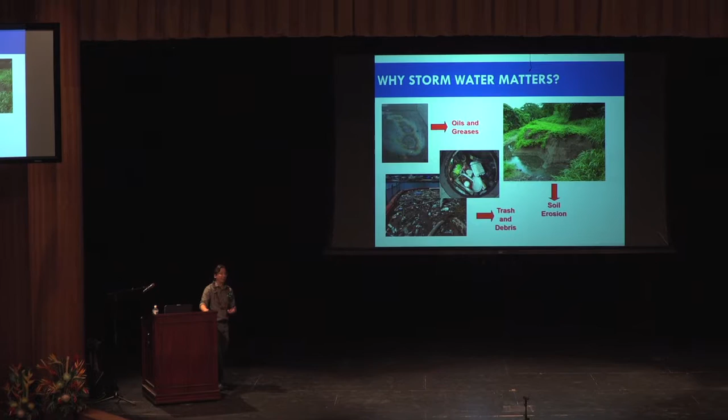As I was putting this presentation together, I started realizing the substantial changes we've undergone as a city agency. This goes back to when I first started with the city, back in 1996, around that time. From what it was then to what it is now, there has been quite a bit of change.

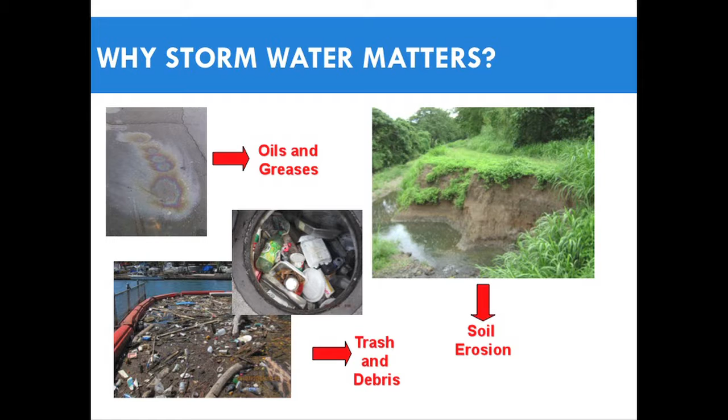So just to give you a little background, why do we do all of this? There are all kinds of sources where pollution comes from: oil and greases from cars and vehicles, trash and debris whether organic or man-made, and soil erosion, whether in the stream itself or caused by human activities such as construction.

Our program is in place under the large Clean Water Act, a federal program that gets handed down to all the states. The city and county is basically a regulated entity, so the city has to apply to the state for a permit. That permit allows us to discharge water from the city's drain system into receiving waters like streams, canals, and waterways.

You can see some of the effects of this water pollution on the receiving waters, such as sediment runoff. You can see a lot of the debris, the floatables, and of course a lot of that discoloration.

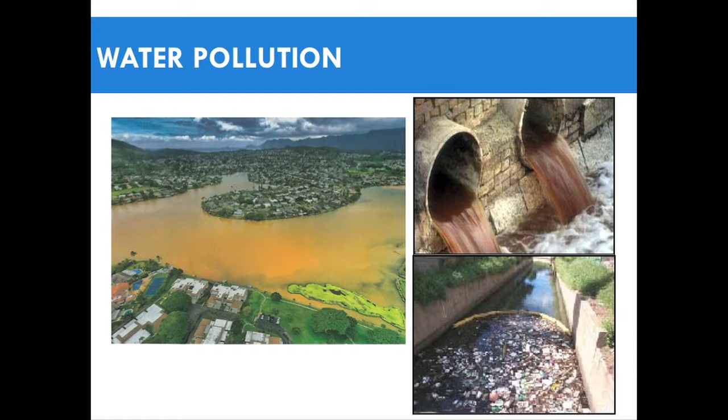So what are some of the immediate goals the city is trying to accomplish through its permit program? One is we're trying to comply with our MS4 requirements. The second is we're always trying to streamline our processes, since we have quite a large impact as a city, affecting pretty much all the residential urban areas throughout the island of Oahu. We're also trying to come up with a consistent approach.

Since there are regulations at the federal level as well as the state level, we're trying to come up with something consistent with existing programs so we're not overlapping or duplicating, but also not going against the current regulations. We also try to streamline and standardize the process, which is one of our goals within the city itself.

As Marlena mentioned, one of the things we're tasked with as a city agency, part of our Department of Facility Maintenance, is that we need to coordinate with all the city departments.

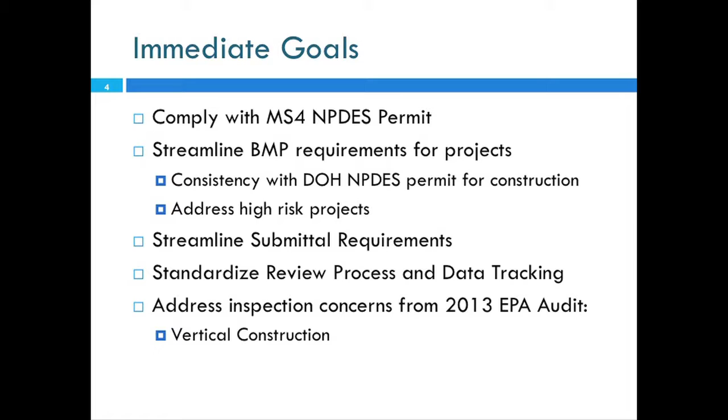The stormwater program, the way we approach it, is basically one water. It's not just one department or section's responsibility, but the whole entire city that's responsible. So we coordinate with the fire department, police department, parks and recreation, and enterprise services.

We also work with agencies that implement programs pertaining to construction, like our Department of Planning and Permitting and our Department of Design and Construction. More recently, with the rail project for HART, we've had to do a lot of this coordination, making sure everybody is following the guidelines.

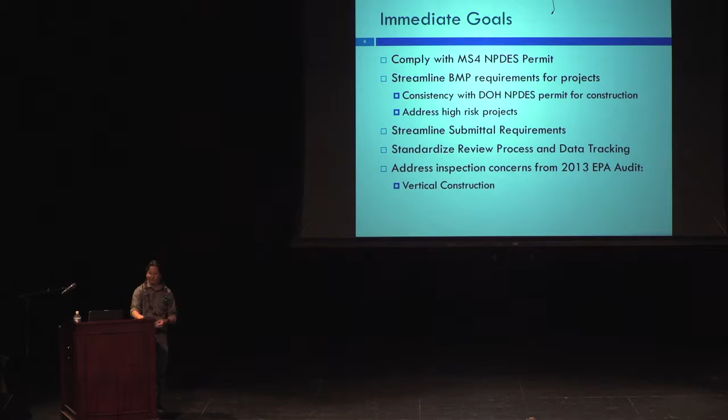Lastly, for the long term, this is ultimately, I think, what everybody here is working toward. Taking the first step to attend this workshop is a good step on your part. What we're trying to do is promote a sustainable future, protecting our nearshore waters like our beaches, streams, and ocean. Here in Hawaii, we're basically on an island surrounded by water, so whatever impacts we create will impact future generations. That's probably one of the long-term goals we're always trying to establish.

Now, how does this affect construction? Primarily, it's handled in the city by the Department of Planning and Permitting. Within their department, they have rules referred to as the rules relating to soil erosion standards, adopted in 1999, and the rules relating to storm drainage standards, adopted in June 2012.

Erosion standards are more for temporary things, things that occur during construction where you have to follow certain practices and implement best management practices, or BMPs. The drainage standards look more at long-term permanent things that, once built, will be there for the next 10, 20, 50 years. That's how the city implements its programs.

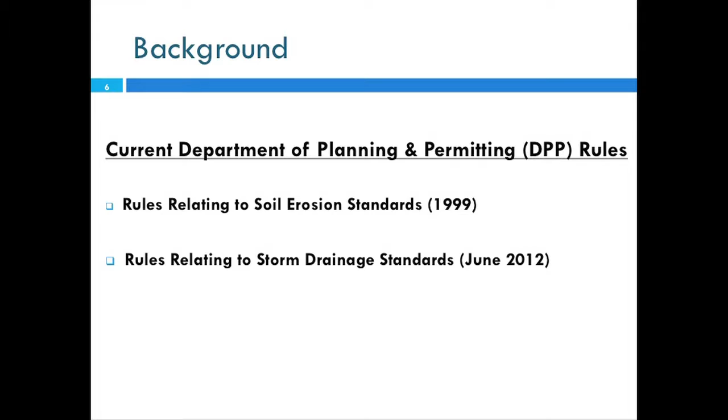When we talk about the overview and changes I'm going to be sharing, some of what started this whole movement goes back to 2013, when the EPA, under their Region 9 office, performed an audit of the city's program.

Their inspectors or auditors came down to look at the city's overall program. It's a pretty big deal where all city departments are asked to come in, and they evaluate how the city is following its permit and implementing its program. From that evaluation, they found several permit violations as well as program deficiencies. As it relates to construction, they saw that the city's construction plan review and BMP requirements were inadequate.

When they looked at all our documentation, the rules I mentioned earlier, they felt it was inadequate. The other issue was inspection oversight—for both public and private projects, the city wasn't performing its necessary inspections in accordance with its program plans.

They also recommended the city implement dedicated stormwater inspections, looking at BMPs to make sure contractors were following the plans they had put in place, and then developing a risk ranking process to evaluate its effectiveness. Based on that audit, a notice of apparent violation was issued to the city in October 2013.

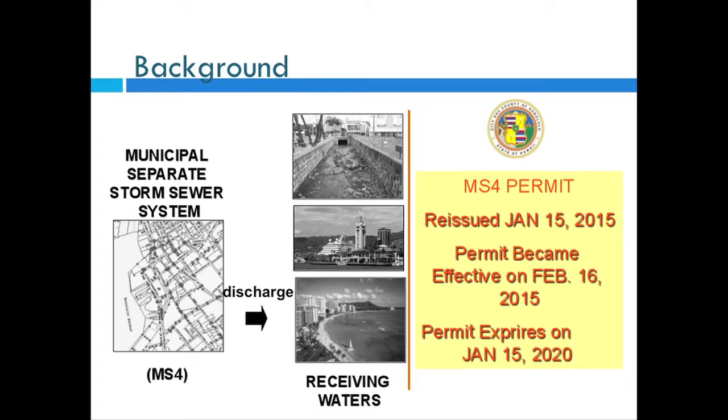The city manages this through its stormwater management program plan, which has 6 elements: public outreach, pollution prevention—including housekeeping practices like street sweeping and drain cleaning—post-construction measures, industrial and commercial programs, illicit discharge monitoring, and the one I'll focus on for this presentation, the construction site runoff program.

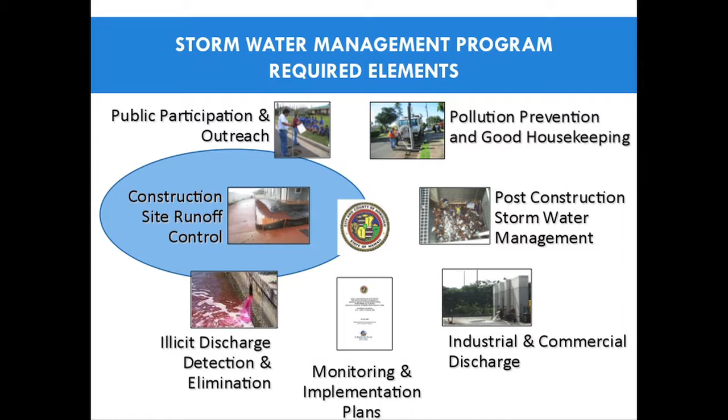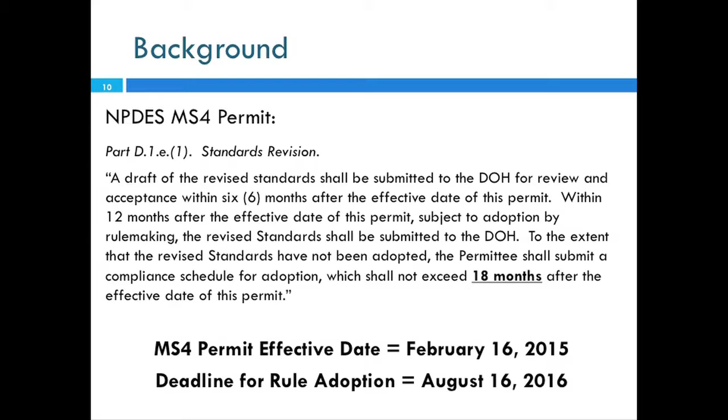So as I mentioned, the city's permit was reissued in 2015, and in that permit it basically said that within 18 months, the city shall update its rules as it relates to both construction and post-construction. That essentially put a deadline of August 16, 2016, by which the city needed to go back, look at its existing rules, and update them to be in compliance with those requirements.

As I mentioned earlier, we had two separate rules, one pertaining to drainage, the other pertaining to construction erosion. What we essentially did was combine them into one. This made it a lot easier from a clean water environmental standpoint, since it was all under one rule rather than having to refer to one versus the other. It also put everything in one place so we could always compare to see if there were any discrepancies.

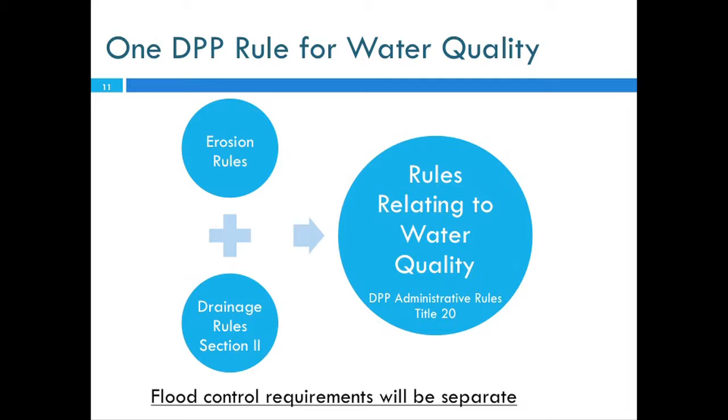So that's where it led to what we're now referring to as the rules relating to water quality. Some of the timeline: back in 2015, that's when the city's permit became effective. On March 6th, 2015, the Senate introduced a resolution that went through, asking all the county agencies to go back and look at their rules and see if they needed to be increased or made more stringent. That was already on our mind because of the permit, but this was another thing that came across our desk.

One thing we did prescribe in those rules, though, was that we didn't want to make them effective until one year later, which is why on August 16, 2017 the rules actually become effective. The reason is we made such substantial changes to those rules that we felt we needed to go back, talk to all the city agencies, get the contractors involved to do a lot of outreach, and start implementing these changes within our programs, because it's going to change how they do their reviews, how they track information, and how they process all these new plans and submittals pertaining to the city.

Within those rules, there are certain key definitions I wanted to point out. Some things we want to emphasize: what is considered a regulated project versus a non-regulated project. A regulated project is one that has to come into the city for a grading, building, stockpiling, grubbing, or trenching permit. Any of those permits would automatically trigger falling under these rules. If it didn't trigger any of those, then the city wouldn't have jurisdiction over that.

There are also some specific exemptions built into the rules, like emergency work and putting out traffic control devices, signs, striping, and things like that, which isn't necessarily where there's land disturbing activity. Whenever you penetrate the ground, actually disturbing it and moving the soil around, that's where we want to target. This is where the rules become effective.

The other key definition I wanted to point out is the erosion and sediment control plans. This is something the city implements as part of how it complies with its requirements, and it's a key part of how the inspectors follow what the contractor is doing. Basically we're talking about the actual drawing that shows the limits of your project, where all your critical points are, your discharge points, catch basins, inlets, where you're going to be disturbing the site, and how you're going to be phasing your work. As a contractor, you use it while doing your work, but the city also uses it as part of their inspection process.

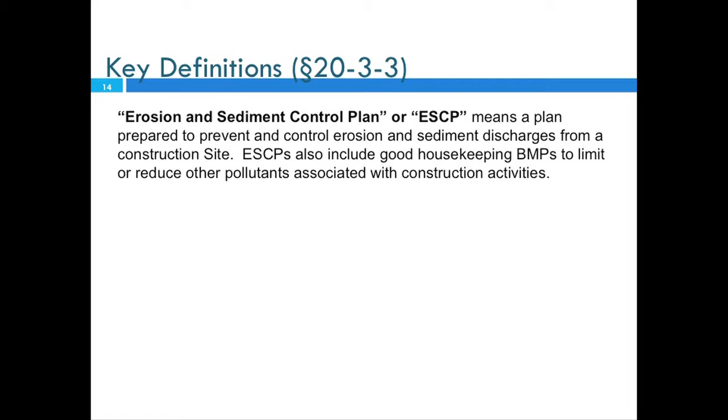That's something we're making changes to in terms of what needs to go into these sediment control plans. This is somewhat separate from what the state requires, because under their NPDES program, the State Department of Health requires that you develop what's called a stormwater pollution prevention plan, or SWPPP.

It's a similar process, but it streamlines things for a city inspector in terms of what they're looking for on an actual drawing. They can pinpoint the location of where these BMPs are going to be installed and how you're going to go about doing it.

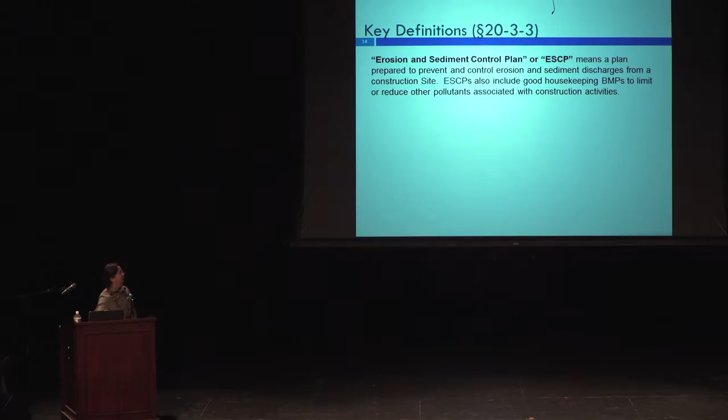Other key definitions I wanted to point out: something we've added into the rules is a certified water pollution plan preparer. It's still in development, not something the city has really put in place, but it gives us an opportunity to come up with a more standardized process to get someone preparing the plans to be more trained and qualified in putting together erosion and sediment control plans.

We don't have it in place right now, but it's described in the rules. The other thing the city has always had in place is a design engineer—a licensed civil engineer in the state of Hawaii who can stamp the drawings. This pertains to larger projects where, under the city's ordinances, somebody with those qualifications needs to submit the plans to get approval from the city.

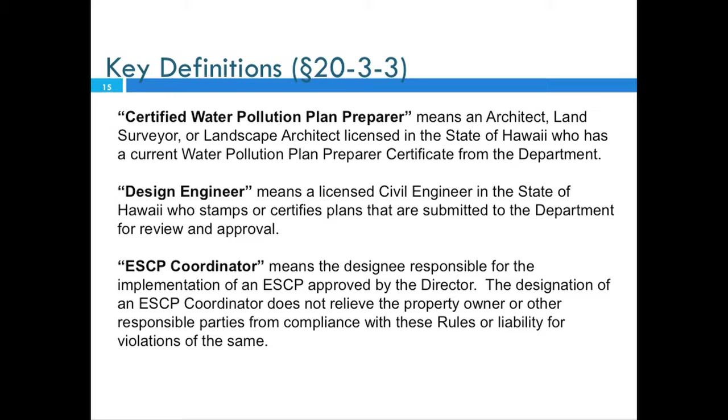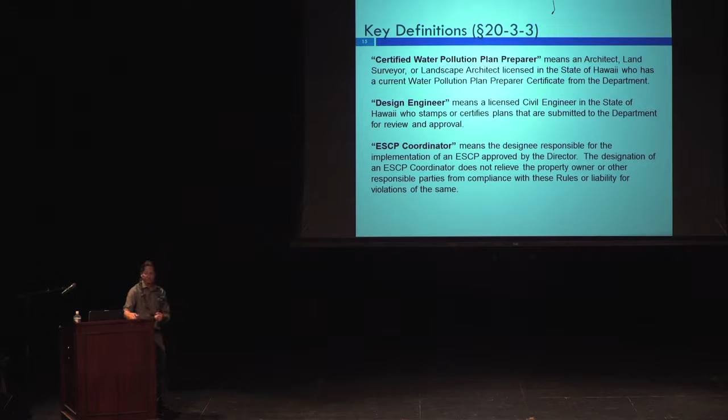The last one is the erosion sediment control, or ESCP, coordinator. This is somebody who doesn't necessarily have specific training, but is the designated person providing inspections of your construction site—making minor changes to the plans or doing the inspections themselves, as the representative of the owner. This can also be the owner himself, for smaller projects, but it's basically a designated person who's responsible.

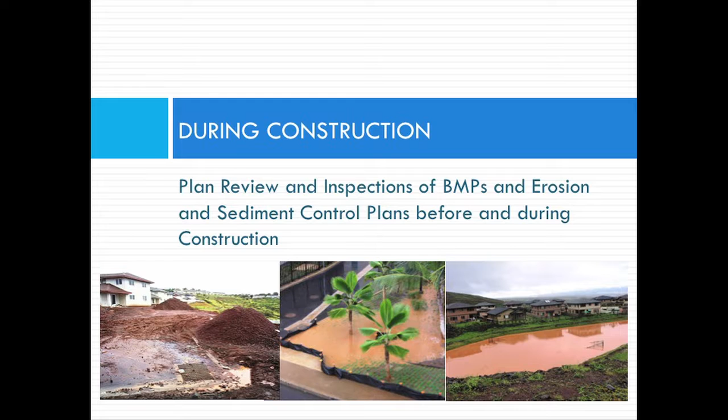So when we talk about construction, we're talking about how we go about plan review and inspections. Some key points from a city standpoint of how we encourage contractors and developers to comply with requirements: one is putting together an adequate and effective erosion and sediment control plan, or in the State Department of Health's case, a stormwater pollution prevention plan, SWPPP.

The other thing is emphasizing the training you provide to your contractors and subcontractors, and the communication process. We see a lot of times when meeting with contractors that they're assuming somebody's going to take care of it, but because of that communication gap, there's no one person responsible, or everybody's pointing the finger at somebody else. So it's key to continuously communicate and provide training for your subcontractors and contractors on site.

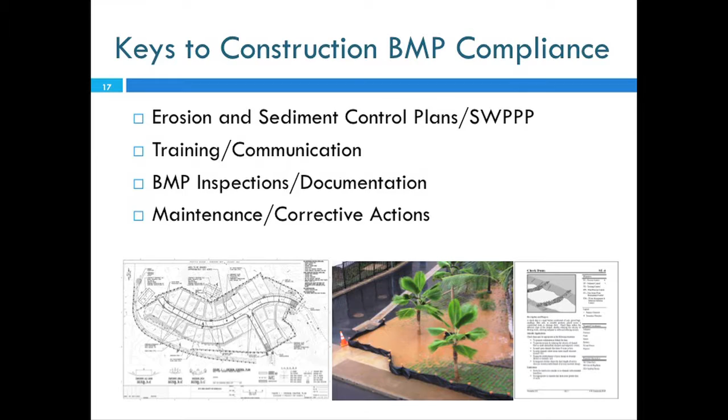And of course you have the inspections we ask the contractor to perform, as well as documentation. Those are important to have on site, because that's what lets the inspector who visits see how you're staying on top of BMP implementation and maintenance.

That leads into the last one: how you perform maintenance and corrective actions. We always emphasize to contractors that this is a dynamic process. Projects are always ongoing, so things need to change as site conditions change—something may not work in a given situation, so there needs to be a change at that time. That's where documentation and communication become an important part of the process.

So now when we talk about the current rules that I mentioned that we adopted, some of those major changes we talked about was updating it to be consistent with the state and federal laws. That was one of the key goals that we needed to do.

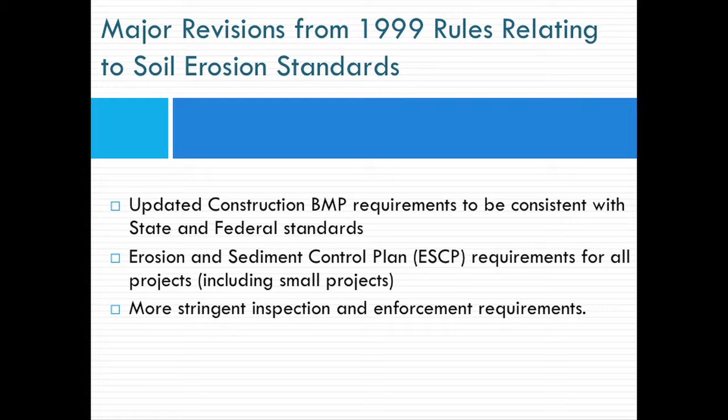And then the other part of it, like I mentioned earlier, was that we had that audit performed, in which case what was pointed out to the city was that we needed to emphasize more of the smaller projects, as well as those projects that are in the vertical stage. So we're talking about high-rise projects, condominiums, things that are in the more vertical stage, like your house building, things like that. And then, of course, putting in more stringent inspection and enforcement requirements.

What we did implement as part of this rulemaking process was we also created subcategories within that smaller category 1 projects, so what we're calling category 1A, 1B, and 1C. The easiest way to look at it is 1A would be your small, 1B would be your medium, and 1C would be your large. So 1C is like your 1 acre and larger.

1B would be anything over 1,000 square feet or larger, as well as commercial development. And then 1A is all your small residential type, where people are putting in a retaining wall, or putting in fencing, or an addition to their existing home or something. So it's something that's less than 1,000 square feet.

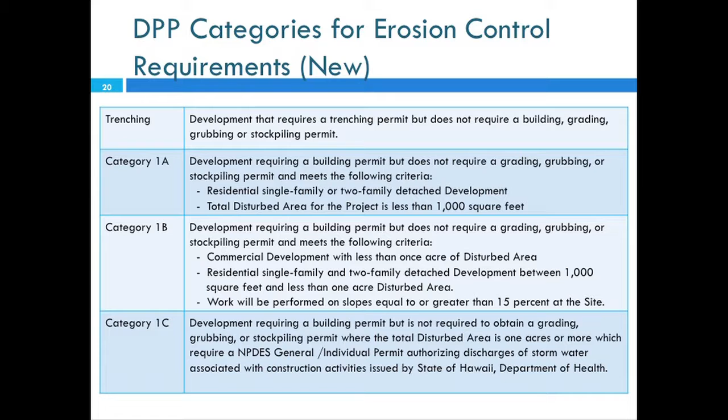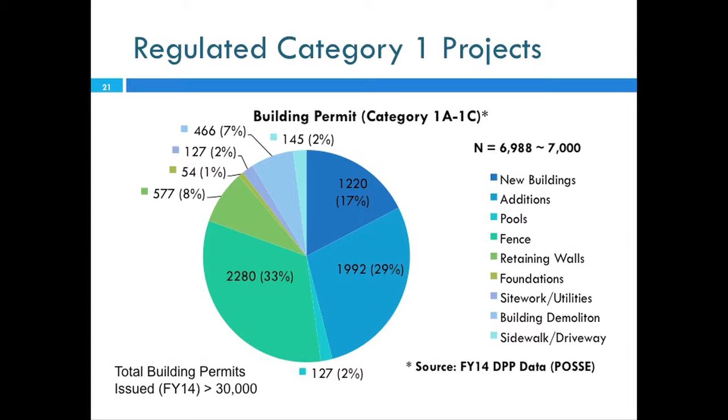But you can also see that the majority of the projects, maybe about 80% of them, are in that new building, additions, fencing categories. The rest are real small, less than 10%, which is like your retaining walls, your foundation, demolition type of projects.

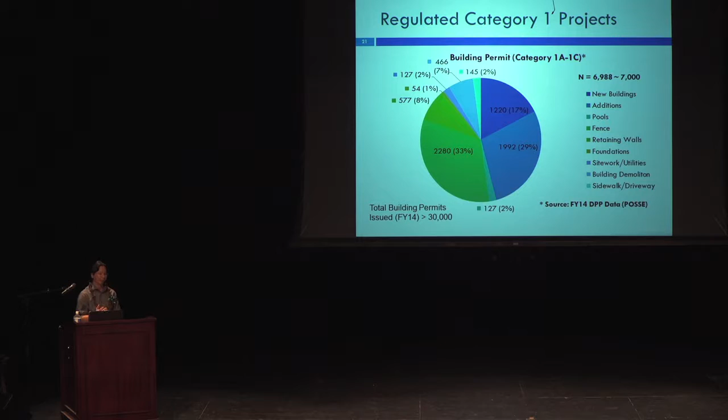Okay, so with the water quality rules I mentioned, there are 3 requirements, and this is for any project that you talk about, both at the federal and state level. We're talking about erosion prevention, sediment control, and good housekeeping.

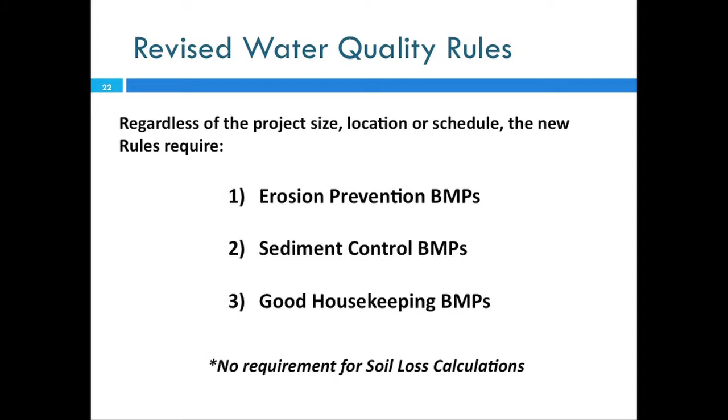Erosion prevention is basically where you're talking about preventing the water from displacing that soil. Once the water hits it, then it's going to start to travel and actually move that particle of soil. So what we're trying to do is prevent that from happening in the first place. Things you could do are, of course, vegetation, riprap, mulch, erosion control blankets are some of the other options. But also you can do things like diversions, where you're actually trying to get the water away from your project site, so that it's not actually flowing through the sloped areas, things like that.

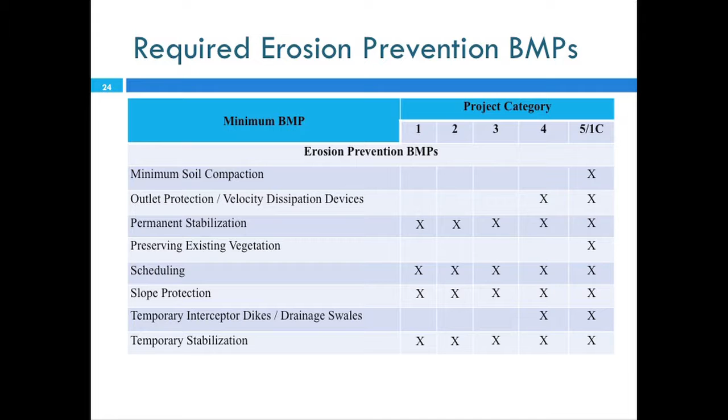So for all projects, whether small or large, the minimum requirements include putting together a schedule, providing some kind of permanent stabilization once the project is done, providing slope protection, and temporary stabilization. But for larger projects, that's when we start talking about diversion structures and preserving some of the existing vegetation.

Sediment control BMPs are for things where water has already traveled over the site and is actually carrying sediment with it. This is not the most preferred method, but it's also the most costly and time-consuming, because now you're actually trying to remove the sediment from the water itself - things like check dams, silt fences, detention basins, and sediment basins.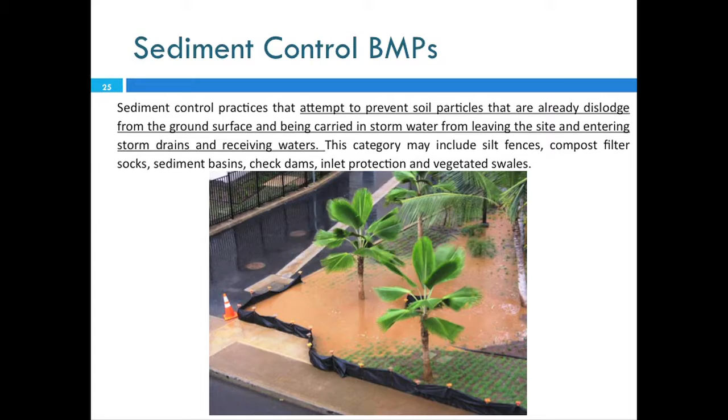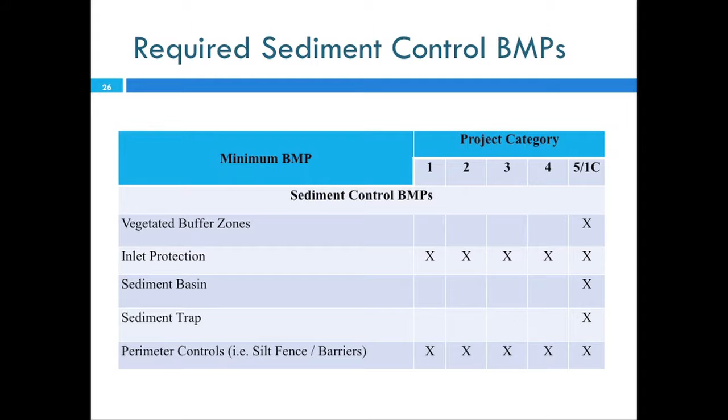Looking at the rules from a category 1 to 5 standpoint, all projects would require some type of inlet protection, whether small or large, and perimeter controls like silt fences or biosocks. But for larger projects, we're talking about sediment basins and sediment traps - things where you need the space to treat that amount of water.

Lastly, we have your good housekeeping BMPs, and this is, I think, the most important one to emphasize because it's the most cost-effective. This is the best way to actually prevent any discharge of pollution from your site. So we talk about day-to-day activities like fueling, chemical storage, where you're storing equipment, and stockpiles.

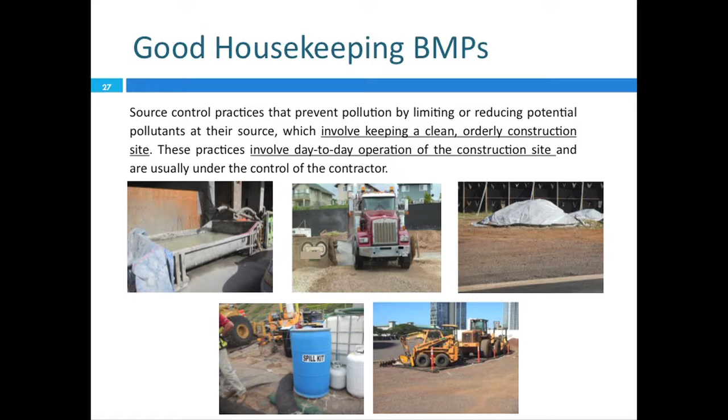So these are all the recommendations of what you would need to do. The reason we emphasize good housekeeping is, one, it's cost-effective, but also because it addresses a lot more of the pollutants besides just sediment - things like nutrients, metals, oil and greases, and pesticides. This is where good housekeeping becomes much more effective.

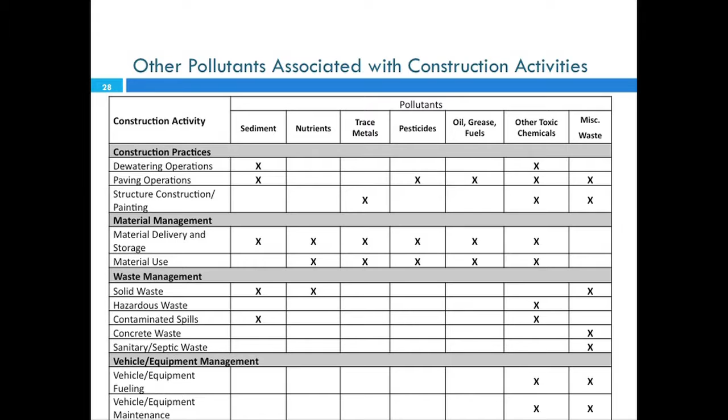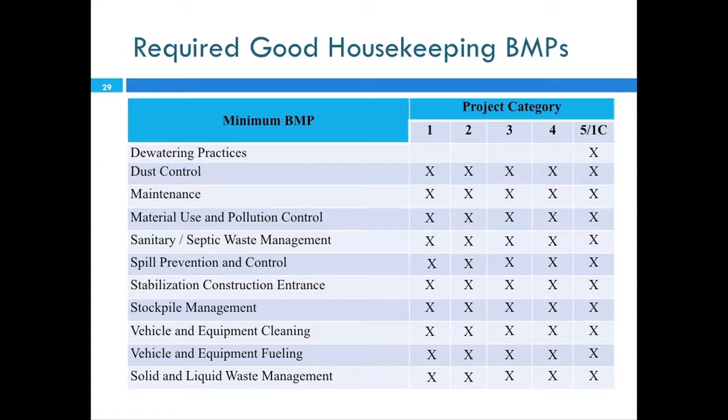And you can see when we look at all the categories from 1 to 5, good housekeeping pretty much applies to all projects. So whether it's a small project or a large project, you would need to take that into consideration.

Some ways the city provides guidance is similar to the Department of Transportation highway system - we have what is referred to as our construction BMP manual. It provides guidance and recommendations, and gives you fact sheets you can use as part of your SWPPP plan, saying these are the practices you'll be following, whether it's a silt fence, with diagrams and things. It's a useful document.

When we talk about erosion sediment control plans, as you're putting all this documentation together, we had to look at it from a standpoint of small projects versus large projects. Large projects, I think, we always had that in place, but for small projects, this is a totally different effort now - something we had to develop. We came up with what is essentially a checklist.

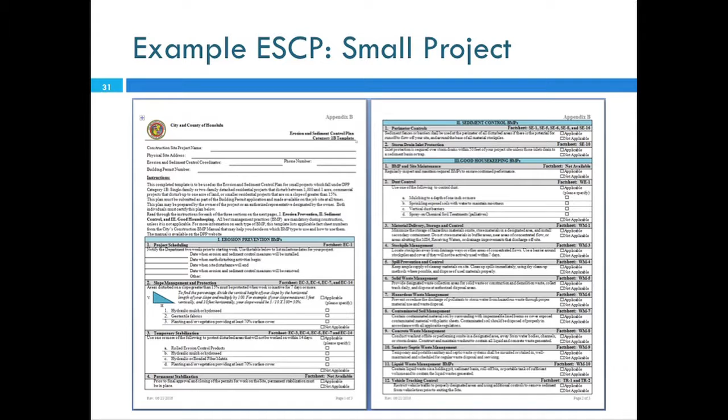This is to guide the homeowner or contractor working on a small project to go through these processes and identify which BMPs they think are most effective, which ones will be applied to their site, and then submit that to the city for approval.

For large projects, which most of you are probably aware of, this is where you actually have a site plan designed by an engineer, with a layout, diagrams, and details.

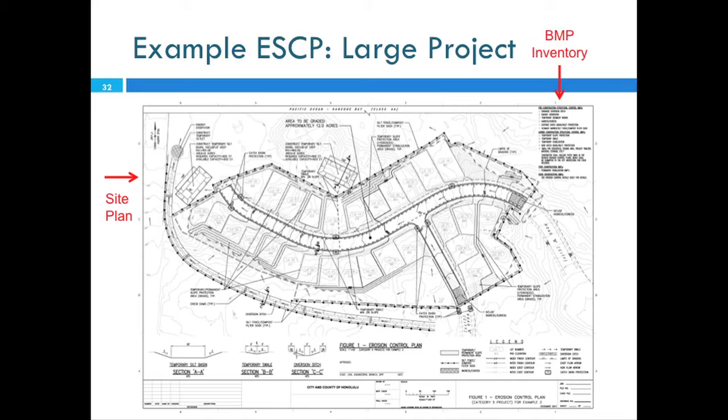Some key things the city expects from a Department of Planning and Permitting standpoint are identifying the BMPs being applied on the site, showing the actual layout of where things are located, and providing details of how it's going to be installed, which helps the inspector verify that things are being followed according to the plans.

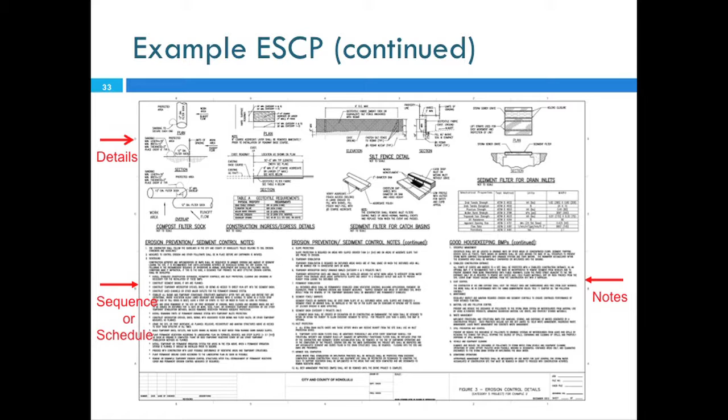You also need notes describing the sequence of events, how you're going to schedule things, and descriptions of requirements for the contractor to follow in terms of maintenance or inspections.

What I wanted to show here is that the site plan was prepared initially, but what we expect from a city inspector standpoint is that this is always a dynamic process going through revisions. You can see the red lines where they're moving a basin to another location, or implementing additional BMPs because the current ones haven't been effective, so they add more BMPs.

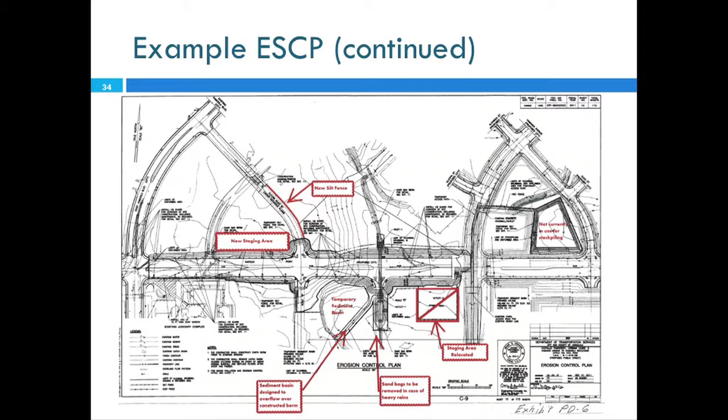So that's what this plan is expected to show - this process of redlining, moving, and adjusting according to your site conditions.

This is also something that, from an inspector standpoint, we need to differentiate between what is temporary versus what is permanent. This is what we call a post-construction BMP plan - what are some things that will be left on the project site after it's built? If you're putting in a sediment basin, is it only temporary, or will it be there at the end of the construction contract?

At that point, whatever is shown on this post-construction BMP plan, they're expecting at the final walkthrough and final inspection that all these things are still going to be in place after the project has been completed.

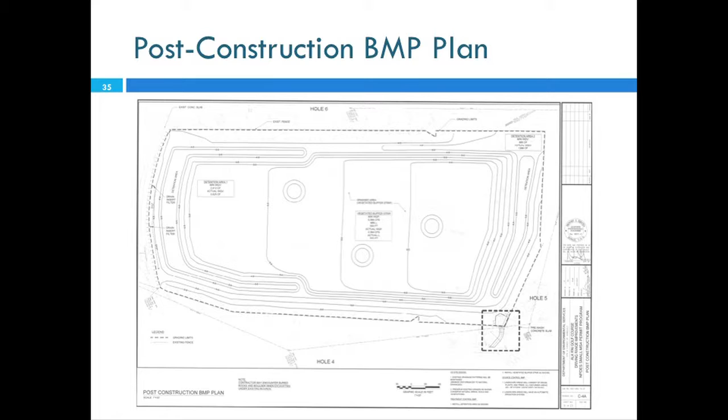I mentioned there are three things the city looks at. One is the sediment control plan. The other is your inspections. The way the city does it, there are three layers of inspections that are implemented.

One is the self-inspections, performed by the owner or contractor throughout the duration of their project. You also have the city inspectors - on a private project, the Department of Planning and Permitting will come out on a regular basis to inspect your project.

But if it's a city project, then the Department of Design and Construction, DFM, ENV, or whoever is responsible for that project will have an inspector come out to verify that the contractor is following their inspections, their documentation, and their BMPs.

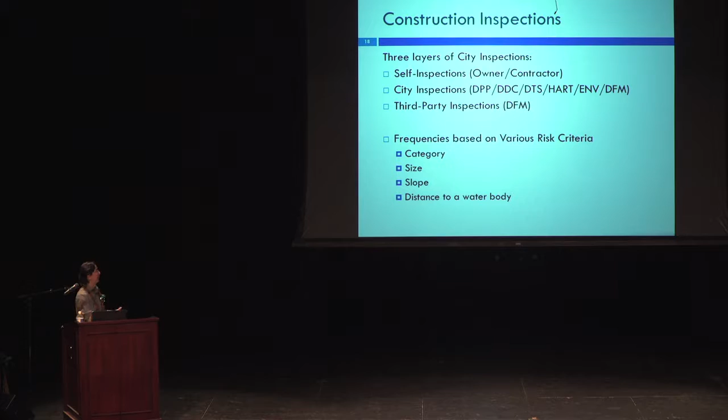And lastly, we have what's referred to as third-party inspections, which just started with this new permit. I mentioned back in that 2013 audit, the state as well as the EPA auditor wanted the city to implement this third-party inspection - somewhat like an independent party not associated with the project itself - to come in and look at how they're performing, how they're following their BMP plans, and how effective it was.

So that's something that we just started this year. If you're a contractor, you might have started to notice some of our third-party inspectors coming out to your sites, basically looking at some of your BMPs and seeing how they're following it.

From a self-inspection standpoint, our rules are basically saying that for pretty much all projects, they need to be inspected on a regular basis, but we came up with this risk ranking process so that larger projects would need it done more frequently.

To be consistent with the state's requirements, for any projects that are 1 acre or larger, you would need to do weekly inspections, same as the state level requirement. For somewhat smaller projects, we felt that Category 3, 4, and also trenching projects would also require weekly inspections because of the critical nature of the trenching work.

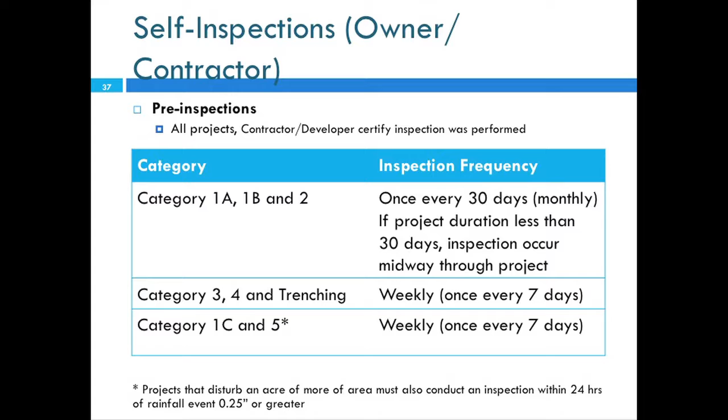Any type of trenching permit that you need to get from the city already tells us that you're doing work in the city right-of-way. So if you're digging up a trench in the roadway, there's a good chance that if there's any rainfall or runoff from your project site, it's likely going to go into our storm drain.

That's why we felt it needed to be done more frequently. But for smaller projects like your Category 1 projects, we're talking about doing inspections on a monthly basis. Not as frequently, but it still needs to be done.

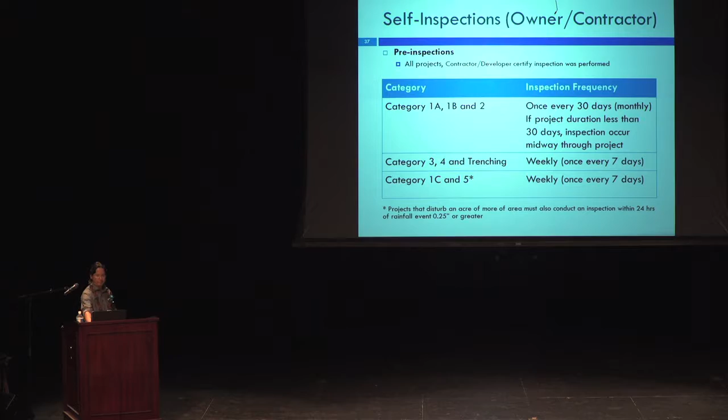In the rules themselves, we're actually prescribing recommendations on the type of inspection checklist that we've developed. We came up with something that's kind of similar to the Department of Transportation Highways inspection checklist.

What it basically has is your general project information, and then the type of inspection you're doing, whether it's a pre-construction inspection, a during-construction inspection, or an inspection during a rainfall event. So you would need to check off which one you're doing.

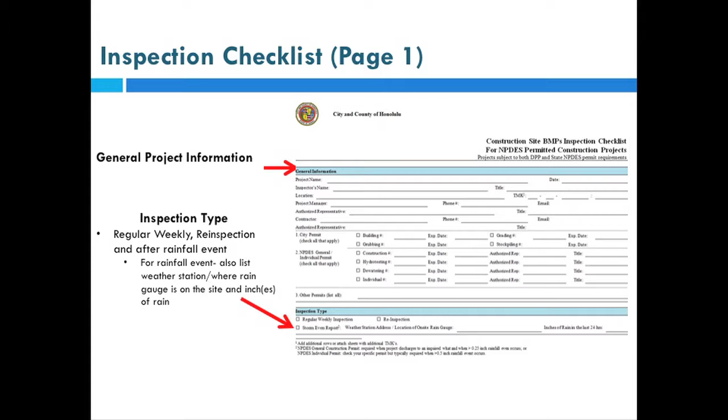As you go through the inspection checklist, you would need to describe the activities you're involved in, what your project is going to be doing, and what documentation you should be having on your site.

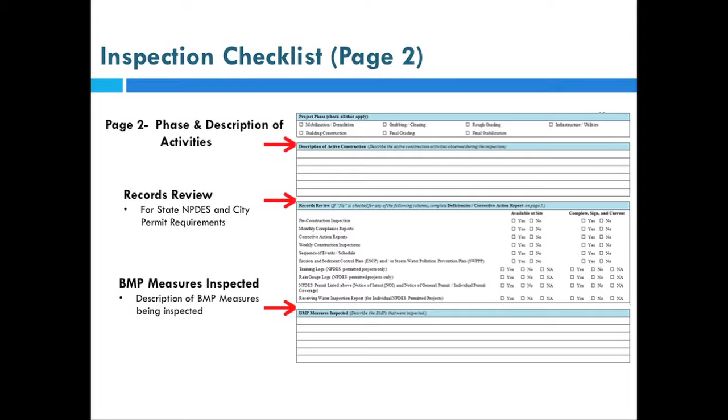This is in compliance with the state's requirements for their NPDES, so you would need to have your monthly compliance reports, documentation for your weekly inspections, things like that, and of course your BMPs that you're inspecting.

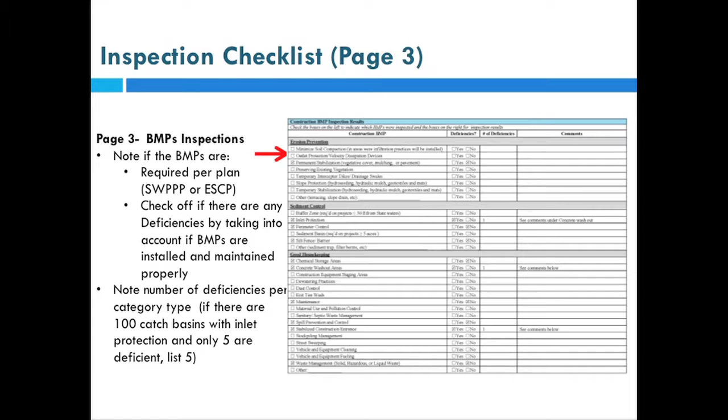The next page would be where you're actually looking at all the different types of BMPs. You would check which ones apply and how they're performing, note any deficiencies, and from there some kind of corrective actions would need to be taken.

Each inspection report would need to be signed by that designated representative. This is where we would attach a corrective action log, noting the photos, describing what the deficiency was, and what corrective actions were taken.

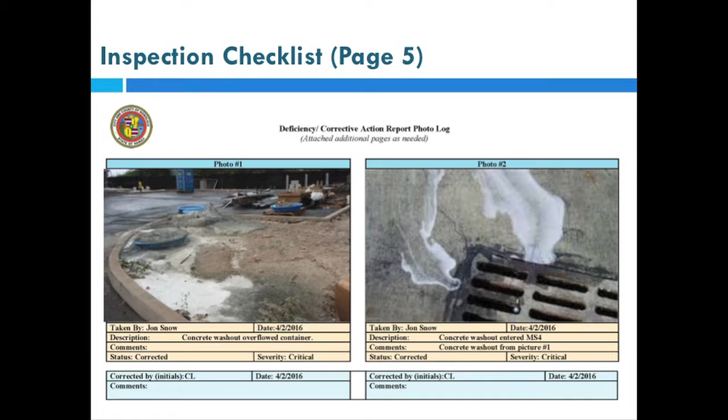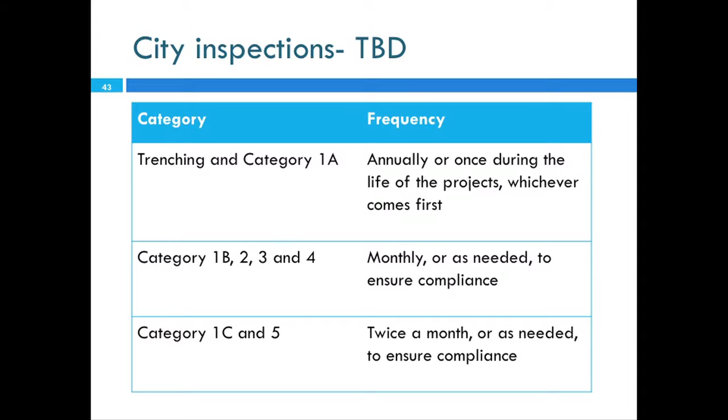Lastly, we have our third-party inspections, for which we're trying to come up with this risk ranking process, because the city has so many projects out there that we're likely going to have to target the most critical projects that we need to inspect. From there, we're going to be coming out on a monthly basis.

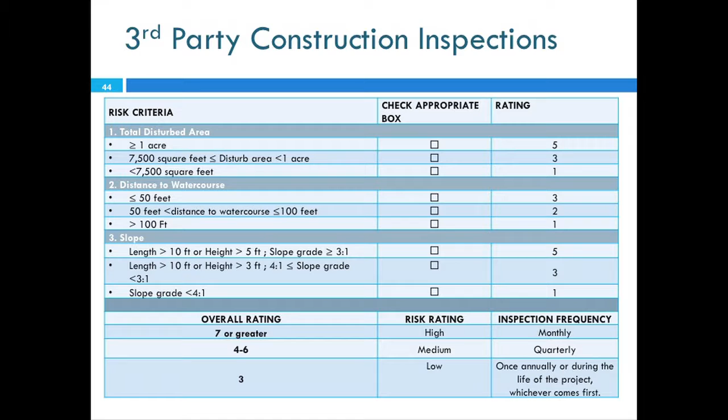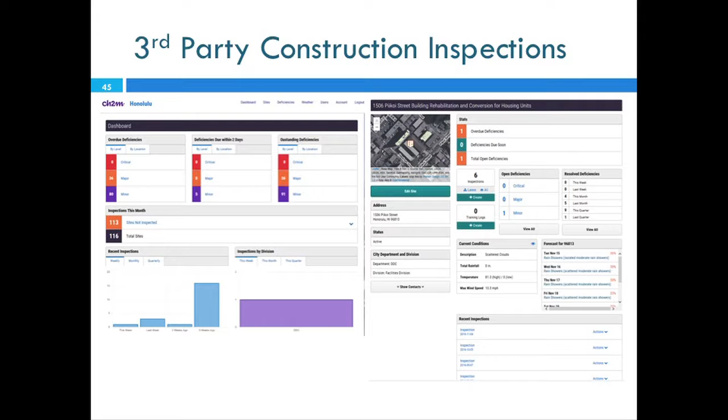This is where we can start seeing how often and how many deficiencies occur and where they're occurring, which helps with our program effectiveness. We can even see which contractors are performing well and how many deficiencies are being issued to each project.

We can actually look at a specific project as well as the type of contractors performing, and we can see if there might be some way that maybe we need to do some outreach, or maybe we need to do more training for a certain type of contractors because we're seeing a lot of deficiencies at those sites.

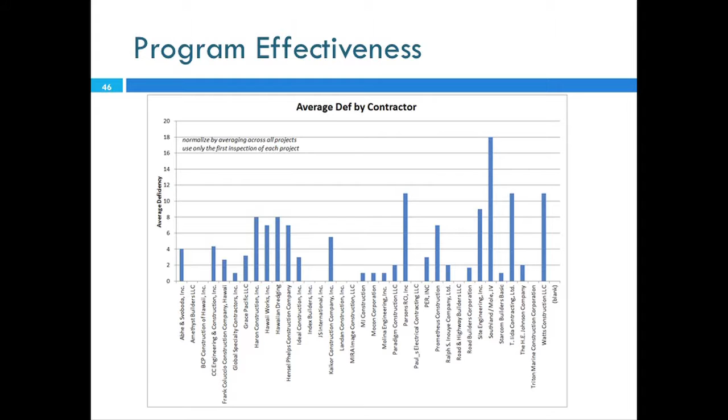The way that we categorize the inspections is we break it down into what is referred to as minor, major, and critical deficiencies. Minor deficiencies are your standard type, things that don't really pose a threat at this stage, but it's something that we think could lead to becoming a bigger problem.

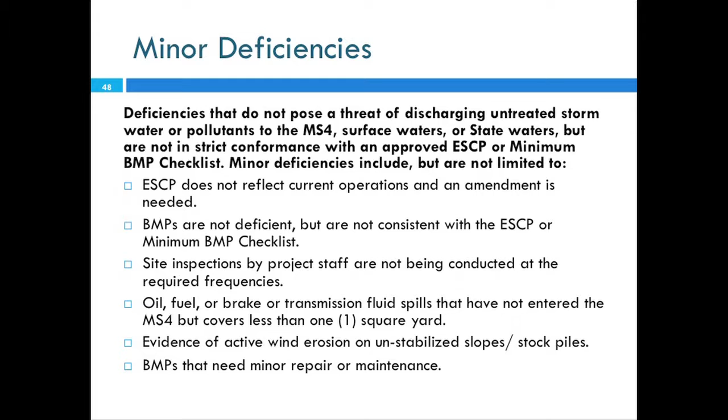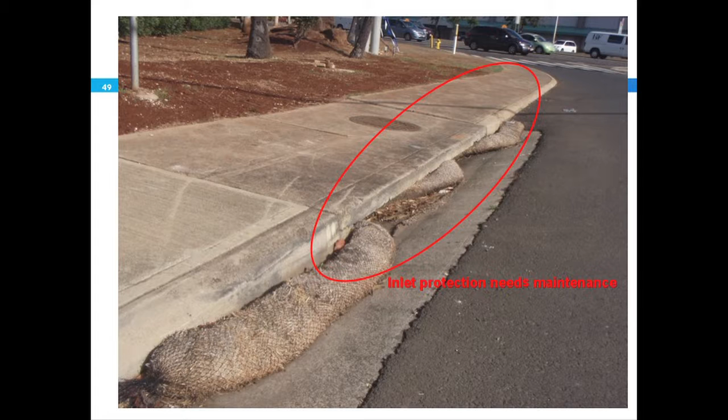So this might be even just documentation, not having your inspections on site or available. Or maybe there might be some BMPs installed, but they're not quite performing up to the standard they should be. Some examples are like the inlet protection device you can see, but it needs maintenance - it's also starting to fall into the catch basin. So that's what would be considered a minor deficiency.

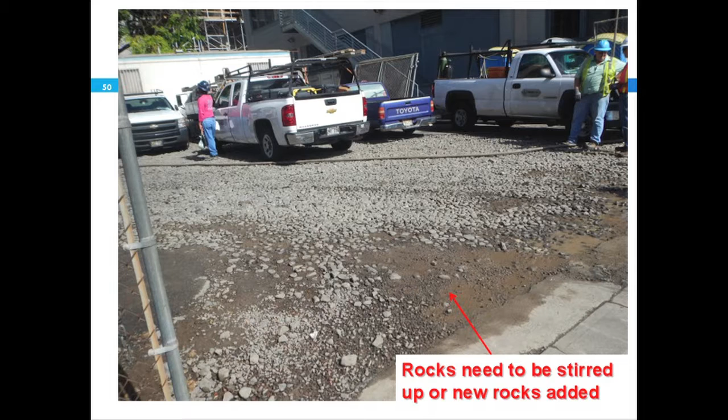You can see like your track out area where you have your entrance, ingress, egress, where they have some rocks used to stabilize that entrance, but you can see it needs to be replenished, or maybe the sediment is starting to accumulate and compact in that area. So eventually that's going to start leading to track out.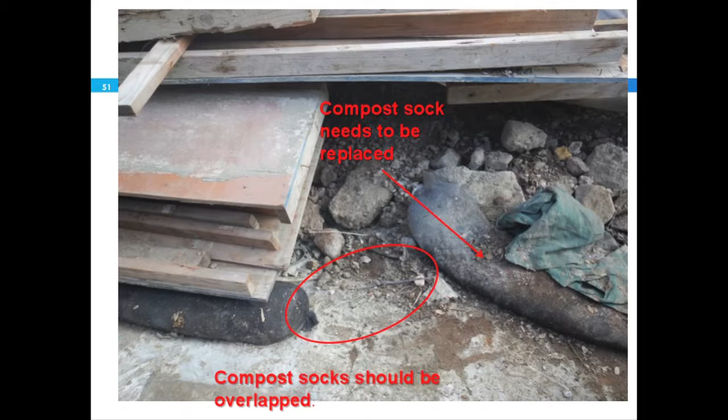Other things are, you can see the BMP not installed properly, where there's an overlap, where that silt - the biosock - needs to be overlapped, and there's a gap instead. Or you can see some small spills less than 1 square yard, but it's still contained. However, it just needs the contractor to clean it up, put in absorbents, things like that.

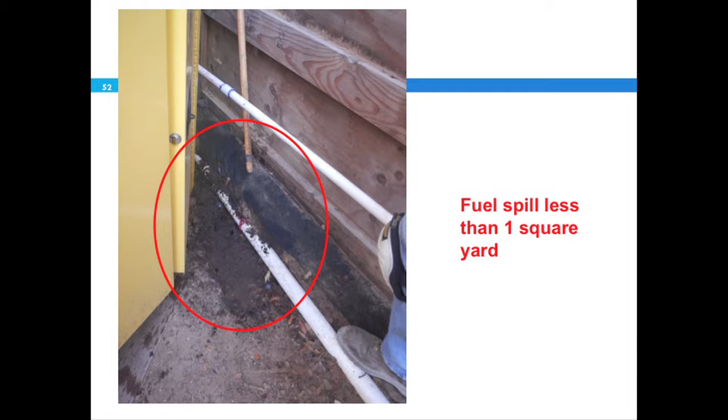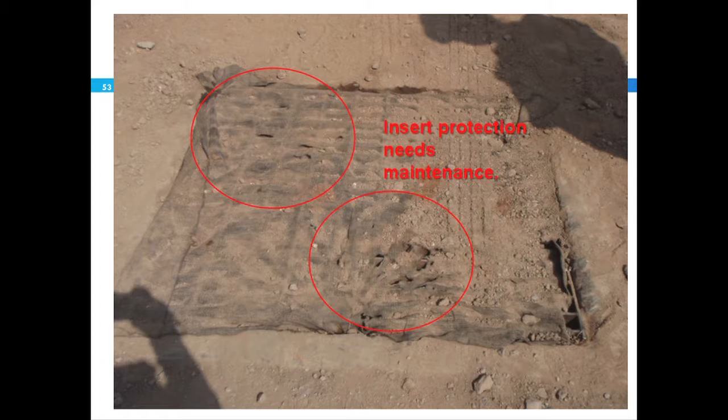And then you also have your inlet protection device where it's been installed, but you can start seeing some of the holes inside of it starting to appear. So it's starting to degrade. It hasn't come to the point where it's actually failing, but it's still leading to a point where it might become a more major deficiency.

So when we talk about major deficiencies, we're talking about something that's more of a lack of good faith - they're not actually implementing BMPs, they're not following their plans, things like that. And it actually leads to a potential that there could be a discharge at that point.

So this is something where you can see that there's actually tracking going on, where the BMP itself - people are starting to run over the bio socks. It's not installed properly to the point where it's containing all that sediment runoff, and it's starting to now lead into where it's a discharge into the roadway.

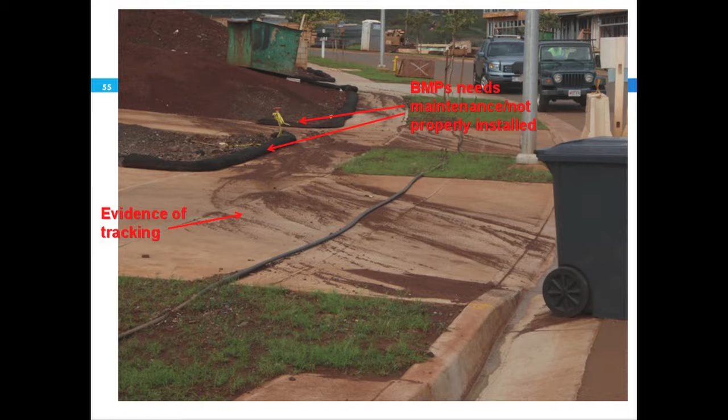You can see here a concrete washout area where it's pretty much exceeded its capacity and it's starting to overflow. So this would be considered more of a major deficiency, where there needs to be maintenance provided, as well as maybe looking at installing a secondary concrete washout area.

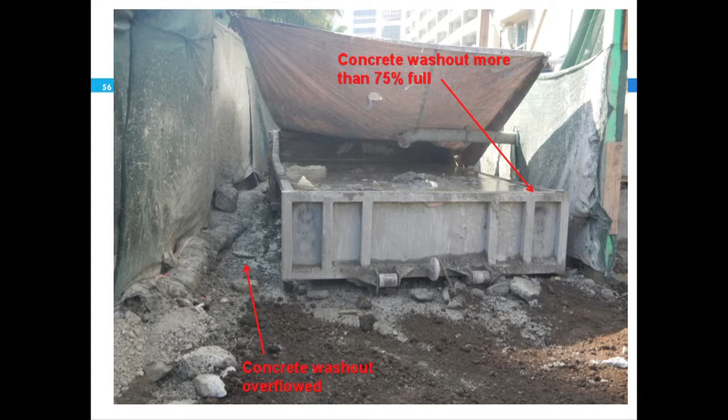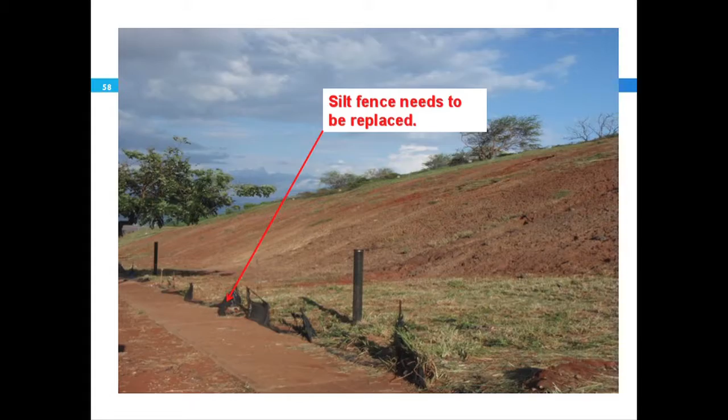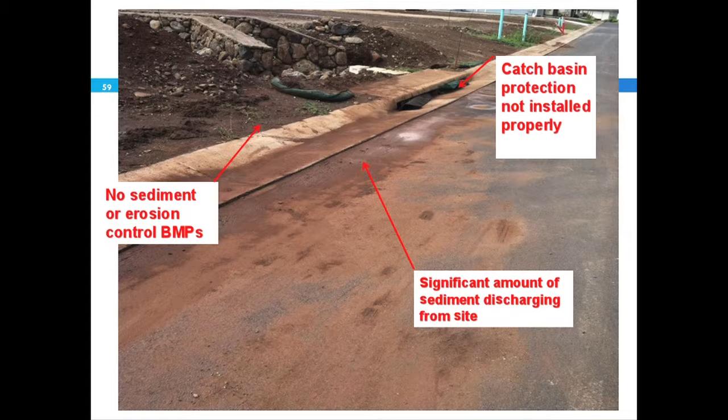Another one, you can see that they did install silt fences, but now it's already gotten to the point where it's actually degraded - it's not even effective at this point. You can see a slope that's not stabilized, where there's no hydromulch or any type of stabilization on the slope itself. Here's another example where there are multiple violations - no actual sediment control, no perimeter controls. There's actually evidence of sediment discharging already into the roadway, into the storm drains, and the catch basin itself that's supposed to be protected is not installed properly.

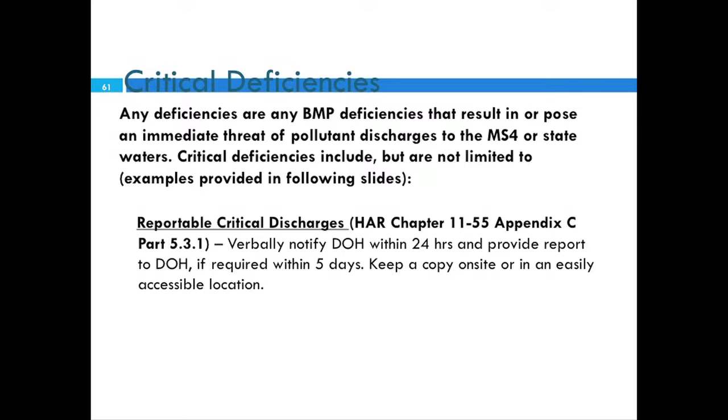Which leads to what is referred to as your critical deficiency. So now this is what we're talking about, where it's actually already posed a threat. It's already in the water itself. So we're talking about when there's no actual erosion controls, it's raining, or it might be their irrigation or something, where it's already washing off into the inlets.

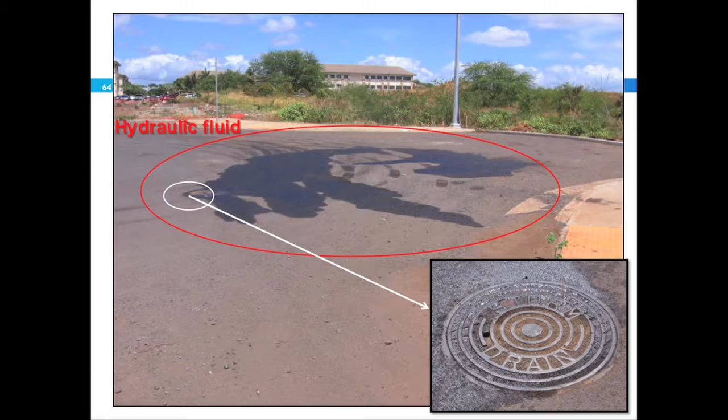Another thing is where they're actually working actively in a stream and there's no BMPs again. So this is, of course, something that needs to be fixed immediately. And then, of course, you have your spills where it's actually going into a storm drain at this point, where it's actually already spilled.

So this is just, what I wanted to do was share why we're all talking, what I kind of went through all of this. I know I threw a lot of information at you all at once, but this is just an example of what we used. This is a project that occurred on the windward side.

You can see here there was a rainfall event back in 2010. It wasn't a real major event. This was probably less than a 2-year, 24-hour storm event, so probably in that two-inch type of rainfall event. So it's not something that's going to trigger major flooding.

But you can see here that they had a lot of slopes that were unstabilized. They didn't have any kind of diversion. They basically relied on just putting together gravel at the base. They put down some kind of sock just to divert the water, and they actually even diverted it directly into the catch basin just to get it so that it wouldn't cause flooding downstream.

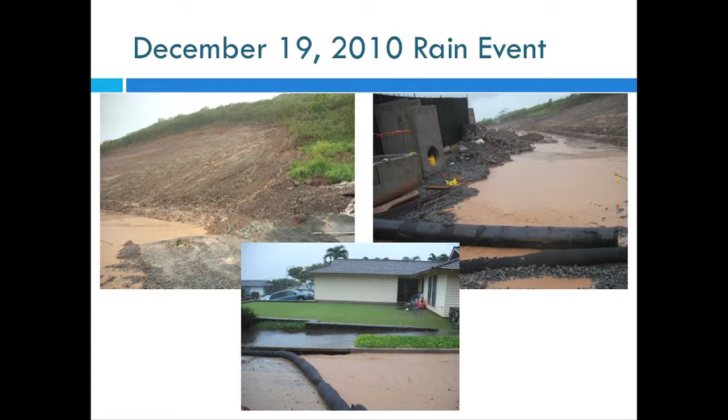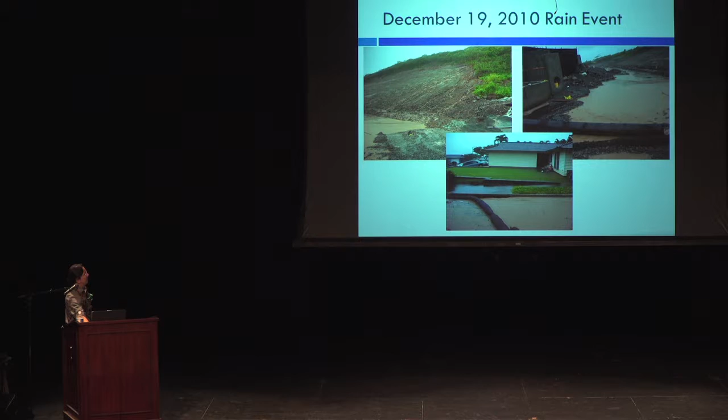So by doing this, you can see that a lot of the BMPs are not put in place, and there's a lack of good faith effort just to follow the plans.

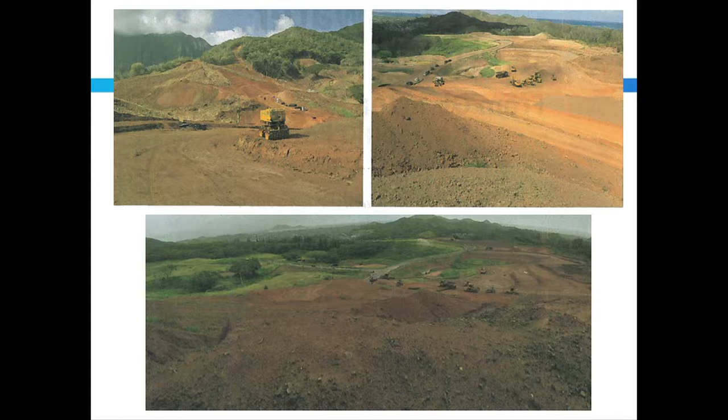Here's another site. You can see that they're opening up a huge area. This is probably going beyond what the city prescribes in its rules, which is trying to limit the amount of disturbed area to 5 acres at a time. But you can see here, this probably way exceeds 5 acres at a time.

It's in a very steep sloped area. They're putting in a subdivision, but they haven't put in a lot of the infrastructure yet. They're just grading, and this is just a mass grading of all this open area and grubbing it.

And what you can see here is an example of what happened. Just during that 2-year storm event, it didn't take a lot for it to basically start running through that drain system. And you can see the effect that it had on the waterway, where it pretty much turned the whole entire lake into basically a chocolate mess.

So this is something that, if the contractors were to at least try to do as best as they can to address, especially the slopes, I think that's one of the critical areas. When you talk about inlet protection, that's pretty much at the downstream end. That's probably the last line of resort.

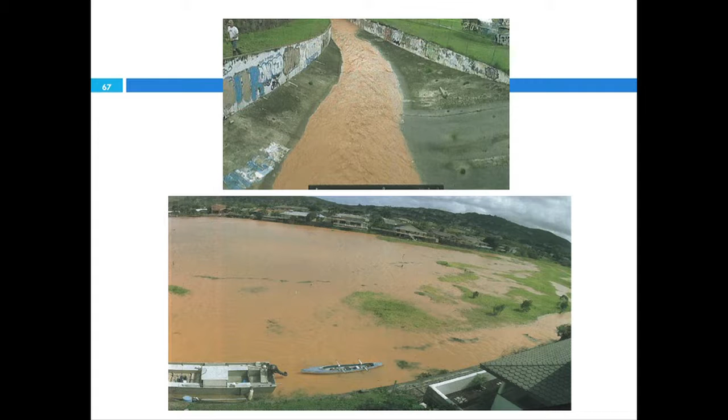But just putting in things like slope stabilization, diverting water away from your project site, sediment basins, of course, are very effective. Putting in diversions just to break up the area of that drainage area - when we go back to that photo of that whole area, they needed to somehow break it up into smaller chunks and not just rely on one basin, because this project did have a sediment basin all the way at the bottom, but that sediment basin wasn't designed for this amount of runoff.

So you could see that it was, in a way, not necessarily designed properly, because in order to address it, they probably needed to implement multiple sediment basins and then break it up into smaller chunks if they were going to go about opening up this amount of area.

This is just part of the planning process. This is part of the design, as well as for contractors to identify how they can effectively address any of those sources. So that pretty much wraps up my presentation.